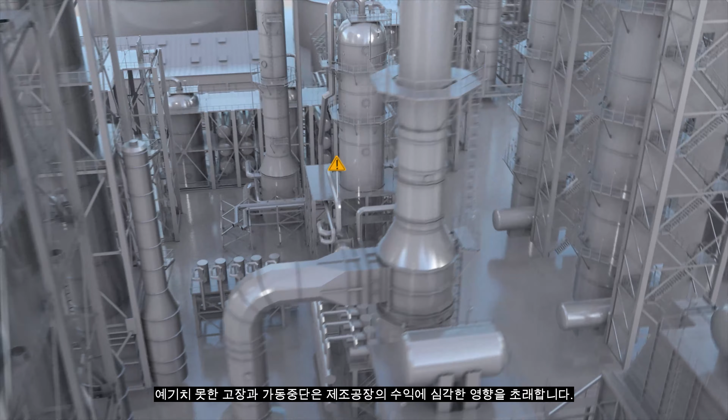Unexpected disturbances and shutdowns severely impact the bottom line of any manufacturing facility. Asset performance management systems attempt to give early warnings of breakdowns to allow maintenance to intervene in order to increase equipment uptime. But asset performance is more than just uptime.

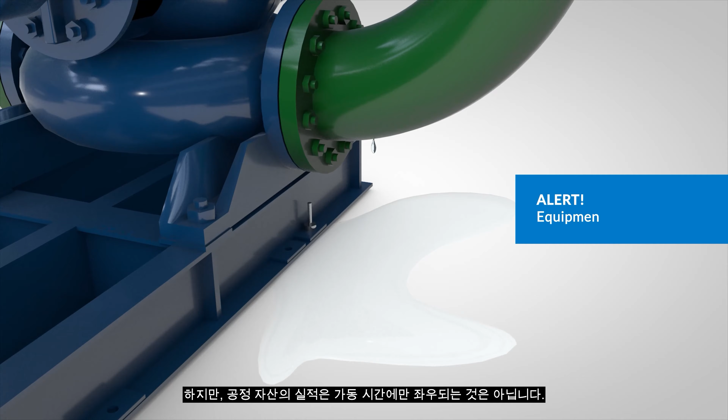The AspenTech APM 4.0 portfolio recognizes that operating conditions fluctuate over time and affect asset integrity and productivity. Consequently, well before any single threshold alert, our APM agents detect errant behavior patterns and direct very early action to correct process or mechanical issues and avoid harmful conditions.

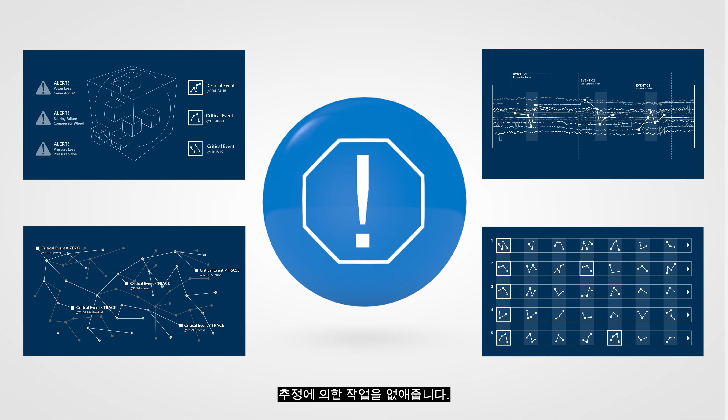The job of an agent is to perform intricate technical and analytical work behind the scenes to help everyone do complex work. Agents remove any guesswork by informing what needs to be known and the necessary action required to both assure production and avoid unnecessary maintenance for all assets.

On a plant floor, agents can cover issues for any piece of equipment. They are quickly and easily replicated to cover all plant assets. Agent scalability assures safety, process quality, and breakdown protection for the breadth and depth of an entire plant.

Anyone can be easily trained to work with agents. In fact, agents provide automation of highly analytical and technical skills so that fewer people can do more faster. The AspenTech agent solutions target explicit APM problems for definitive personnel roles.

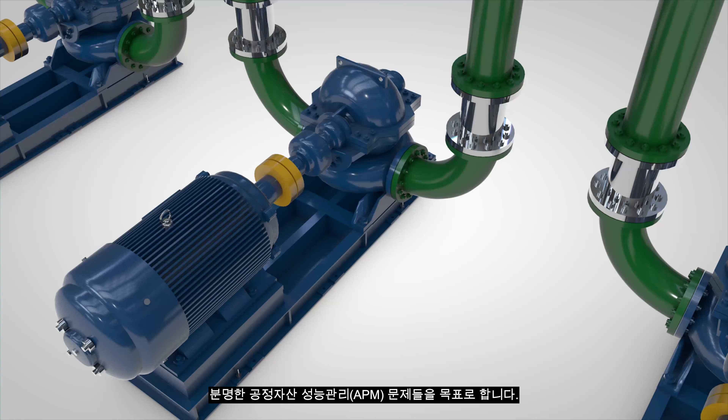For equipment reliability staff, Aspen Mtell agents monitor and predict asset health issues, and with extreme early warnings, they prescribe process changes to avoid degradation issues or recommend maintenance action for safe, orderly service.

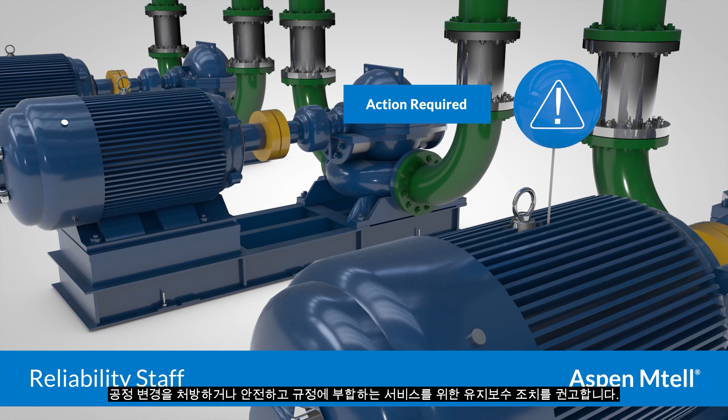Process operators are on the front line managing production, so with Aspen Event Analytics, agents help them recognize and correct any operating disturbances to make sure little problems do not grow into large catastrophes.

ProMV agents assist process engineers by advising precise adjustments to avoid poor grade product and guarantee maximum yields.

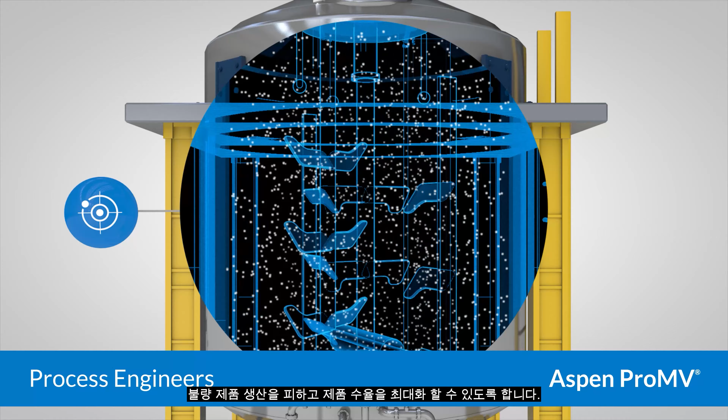With Aspen Fidelis, users planning projects can make decisions based on exact quantified risks and costs for any CapEx or OpEx spending for all assets.

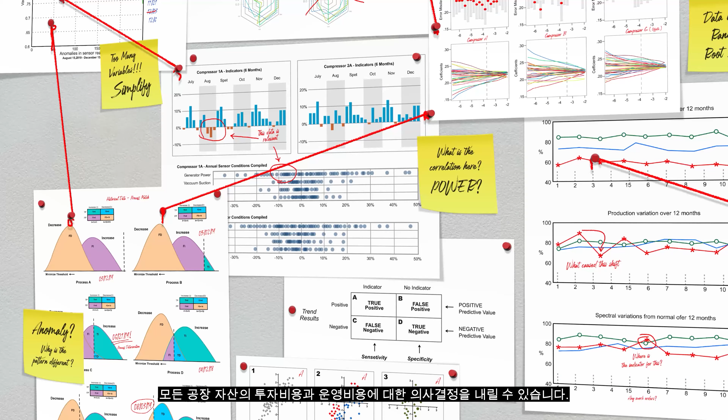And now for other types of problems where data scientists take the lead, agents can customize their solutions for unique issues. And APM Insight agents set up workflow management, providing data and displays 24/7 from any source to assure consistent decisions and follow-through action.

With the AspenTech APM 4.0 portfolio, plant staff can now see and manage all the risks on mechanical and process assets, making sure they are not only running, but running well and producing the right quality and yields with the right level of spending to assure assets run safer, greener, longer, and faster.

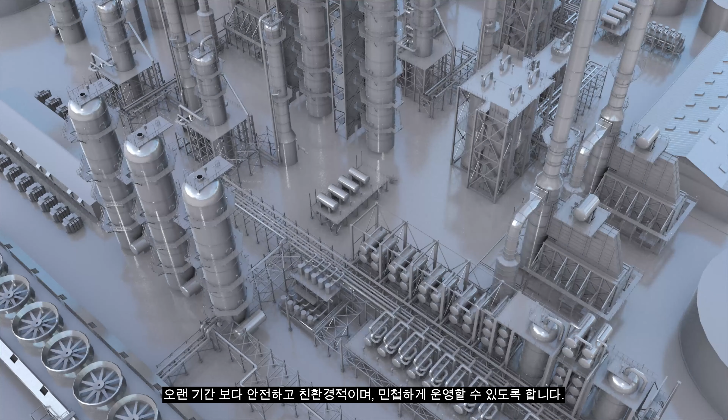APM is no longer just about reliability and maintenance. It is an all-inclusive approach to efficiency, productivity, and safety, a pillar that supports operational excellence and the manufacturer's bottom line.